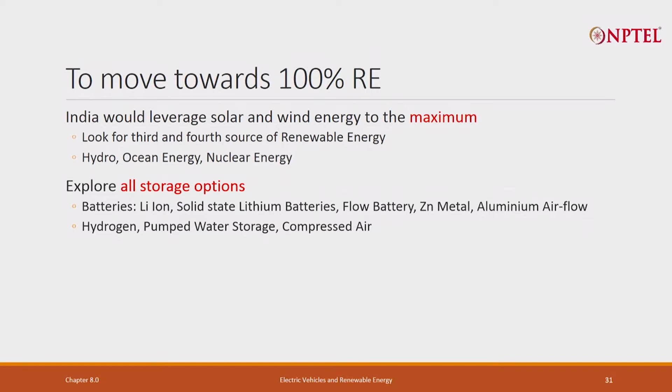So, that will go up, but may not be that bad. Probably 10% of the energy in the country, if I can do long term storage, I probably will be able to work it out quite well. And for 10% of energy, even if instead of 7 rupees it is 15 rupees, it adds an average of 50 paise. Maybe I can afford that. That is what we have to do.

We have to again look at hydrogen, pumped water storage, compressed air. Hydrogen also, the problem is, can I really store so much hydrogen? But all this needs to be really looked at. The third important thing that so far we have not used: if you want to become 100% renewable energy, we have to stop wasting electricity, wasting energy.

Many things in India continue to be inefficient; our usage is very inefficient. For example, our air conditioning is highly inefficient. Can I make it more efficient? Energy efficiency will play a major role, and that is already happening. All our motors are old induction motors, very inefficient. Can I use more efficient motors? The other thing is I can't continue with petrol, I have to move to electric vehicles. That work has to start today, and the first part of our course shows that it is certainly possible.

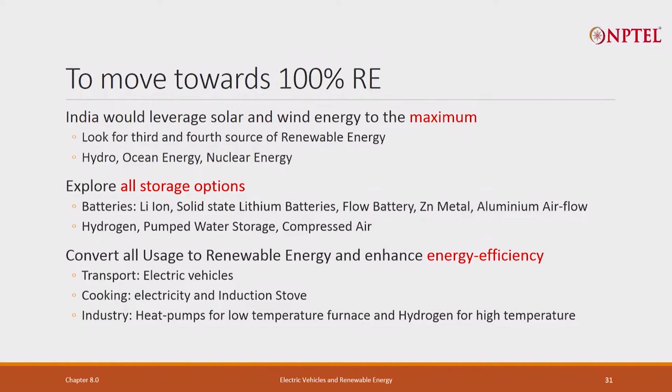Sometimes you do a computation, and if I can make my electricity there, it will make a huge difference. Industry: I have low temperature furnaces and high temperature. For low temperature I can use heat pumps. What are heat pumps? Very similar to the cold pumps which you use for refrigeration. A whole lot of efficient heat pumps can be developed. For high temperature, that is where hydrogen usage is very good. Hydrogen storage we do not know, but for high temperature, make hydrogen from renewable energy and then use it. We will talk about each of these things in the next chapter.

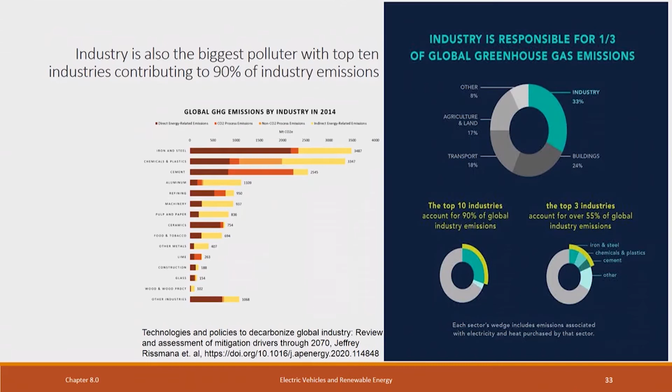Let us look at some other things. Hydrogen. Hydrogen fuel is clean and flexible, very clean. Hydrogen can be burnt directly or mixed with oxygen in a fuel cell. So, it can either be a fuel cell or burnt. Now, you remember that hydrogen fuel cells are not new.

In the 1960s, it was used with rockets, and tomorrow hydrogen will certainly be very important for these things. One is powering rockets, planes, maybe trains and automobiles. Trains can be electricity. Automobiles, this is what long distance truck transport will use. Industrial use, as I told you, is a major usage for hydrogen.

But you know, hydrogen is not an energy source, it is an energy carrier. So, you use renewable energy or some other energy to make hydrogen. So, hydrogen needs to be made from something. If it is made from renewable energy, of course, it is very good. But if it is made from fossil fuel, which is done today, it is an indirect use of fossil fuel. This is not making our hydrogen good. And today most of the hydrogen is generated using fossil fuels.

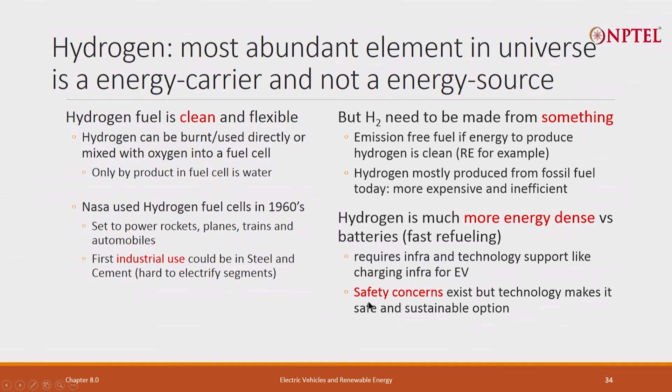Of course, hydrogen has far more energy density compared to a battery. You can compress the hydrogen and you can do fast refueling. It requires infra and technology support, more like petrol pumps. There are huge safety concerns. Compressed hydrogen is not good, but industry can make it safe. Cost is 800 to 900 rupees per kg. But what does that mean? We will come to that in a minute.

But you know, there are different hydrogens. There is black hydrogen made from coal, the most polluting. There is what is called brown hydrogen made from biomass and lignite, which is also highly polluting, or blue hydrogen from ammonia, which is better. Green hydrogen comes from electrolysis using renewable electricity. This cost of 800 to 900 is for these today, not for green hydrogen. Green hydrogen is more expensive.

So, the energy used to generate hydrogen: lowest is coal and biomass, higher using ammonia, reforming by passing through a catalyst to form hydrogen. But if I am using ammonia, should you make hydrogen from ammonia or use ammonia directly? It can be supplied in liquid form, just like hydrogen. So, the question people are starting to ask is, why not have long distance trucks use ammonia directly instead of hydrogen?

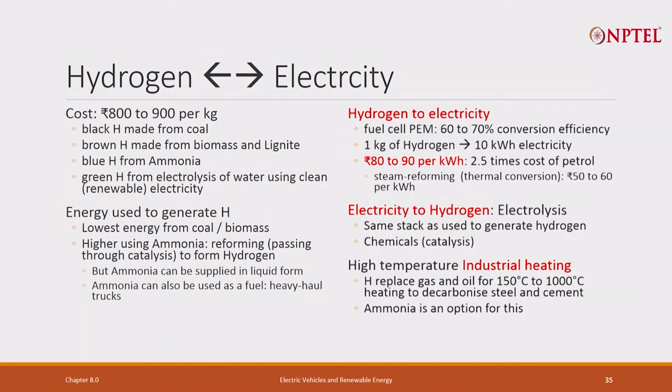And still the drum the government beats is hydrogen. Why? First of all, particularly during Trump days, the United States moved away from renewable energy. Their declared policy was to use fossil fuels, and they started promoting hydrogen, because the oil industry and the whole Middle East didn't want electric vehicles, they wanted hydrogen, and India more or less copies. The Middle East is still pushing hydrogen, and while hydrogen is useful particularly for industry, blindly beating that drum is a problem. Remember the cost.

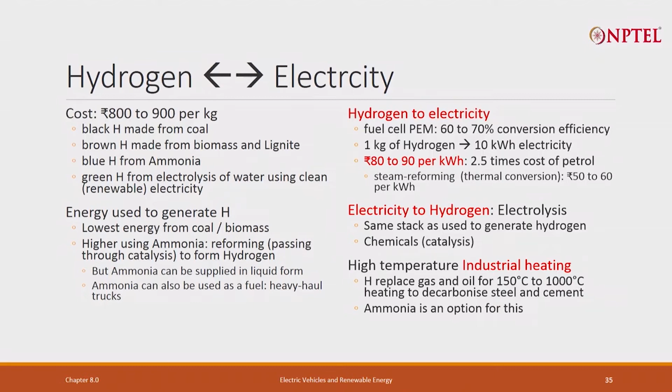As I talked about, for high temperature industrial heating from 150 to 1000 degrees, there is no comparison. Ammonia can be a soft option, but otherwise hydrogen. Hydrogen is projected to become a $500 billion industry. Let us remember one more thing: of the energy that goes into hydrogen, what comes out is less. So, some people are asking, why not use renewable energy directly? The only answer is some places hydrogen is better, particularly industrial usage, and maybe heavy duty automobiles, because carrying batteries will be a problem.

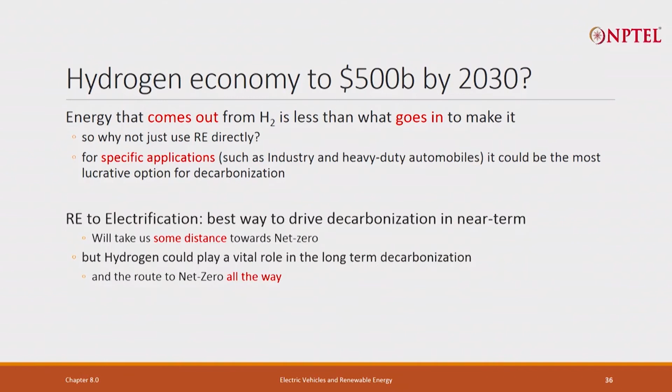So, there is no doubt that renewable energy to electrification is the best way to drive decarbonization in the near term. Once you get to 70-75%, hydrogen will play a very important role. For industry, it will play an important role even today.

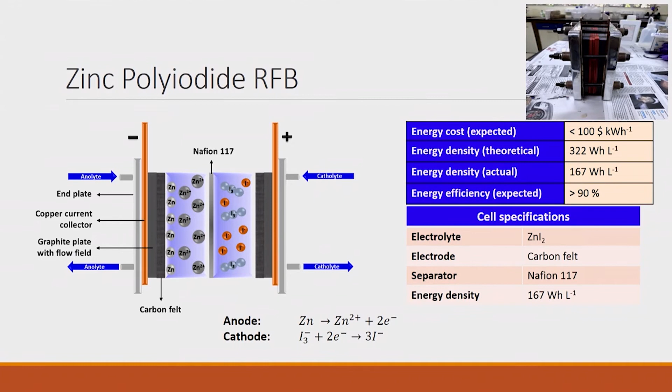Particularly, these are something highly promising. So, this is zinc polyiodide. This is what happens, zinc and iodine are interacting. Its energy density is 167 watt hour per liter, less than lithium ion, but theoretical energy density is 322. Cost is not that high. Materials for this are more easily available than lithium and cobalt, and therefore, it looks somewhat promising. So, work can go on zinc.

But there is this air flow battery, which is only a one way battery, in the sense that it acts as a battery on one side, you can discharge the battery. For example, aluminum air, zinc air, lithium air, there are a lot of options. You can put zinc into this, you can put electrolyte and it acts as a battery. It is a one time usage battery, one time in the sense after you take all the electricity out, zinc is gone, electrolyte is gone. You have to put fresh zinc and fresh electrolyte, that is charging with fresh zinc.

Now, what do you do with the spent zinc and spent electrolyte? Fortunately, there is a regeneration process by which you can get back the zinc and get back the electrolyte. This is like a storage. There are two different plants. One is you keep on creating new zinc and new electrolyte, store it, and whenever you need it, use it in the other battery. Remember, if you can do it cost effectively, you can keep it for 3 months. Zinc and electrolyte will be somewhat voluminous, but not that bad. This can be stored for 3 months.

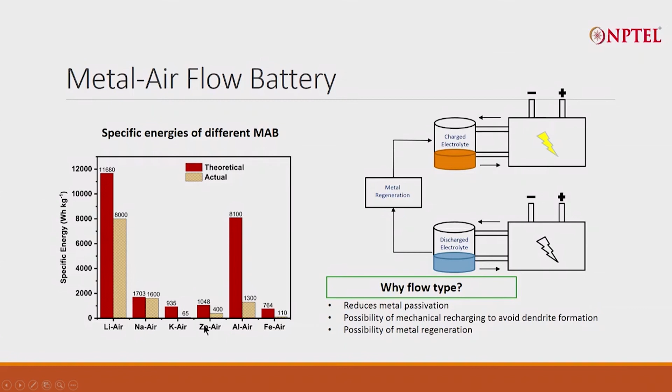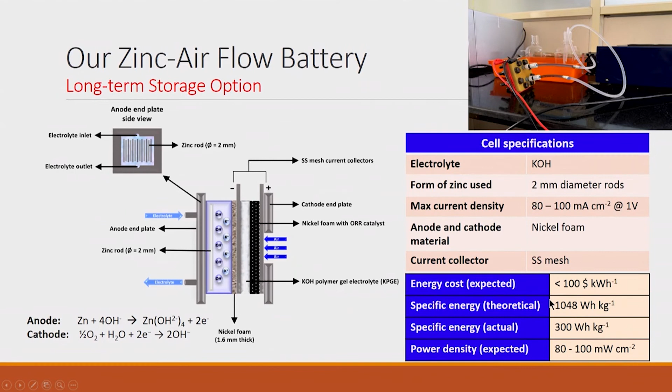And today's zinc air flow battery, of course, while the theoretical capacity is 1000 watt hour per kg, which is very, very good. Lithium ion you do not get more than 300 today, though we are getting about 400 watt hour per kg, 300 watt hour per kg actual, and they are slightly costly, but this is where R&D is required and India needs to pursue this R&D.

Going forward, India would of course expand solar and wind, which play an important role. A third source is important. Small nuclear plants, it will take 15 years for us to get there. Small nuclear plants can be like a tabletop plant, not exactly tabletop, but a small room plant. Can we have that? You know, ocean energy today, large ocean energy, there are plants which convert it to electricity. Coastal India's ocean waves are much smaller. Nobody is doing enough work on that, but that could be another work that could be very important.

The next very important thing is having a very good grid, so that if power is generated in Rajasthan, it can be brought here. If wind is coming in Tamil Nadu, it can go anywhere. And can we have a grid across countries? For example, if I can go with a grid all the way to Saudi Arabia, when ours is evening, when we consume a lot of electricity, theirs is daytime. That time they will generate a lot of surplus. Can I bring that? My storage will also not be required. Similarly, early morning when we do not have electricity, Malaysia or Singapore or Vietnam will have it, can I bring that? Can I put a grid in the country and throughout?

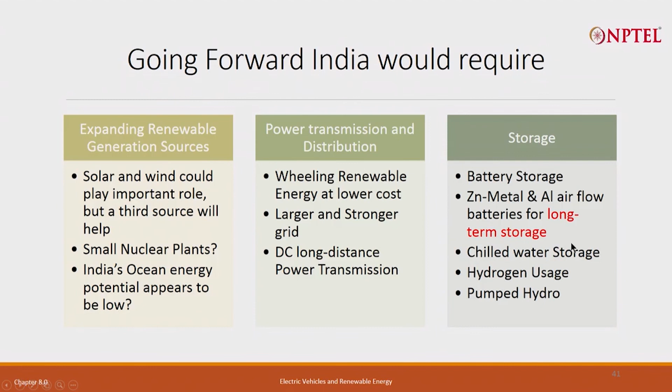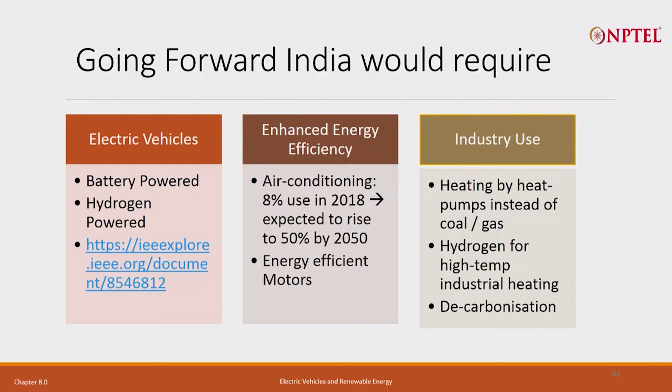Now, of course, you have to work on storage, as I told you, zinc air, zinc metal, aluminum air, chilled water storage, hydrogen, pumped hydro, all of them are important. Electric vehicles we have talked about, this is the high priority. Enhancing energy efficiency in air conditioning will be another top priority. Low temperature heating, we need to do all kinds of efficient heat pumps, that is a good area for Dr. Kaushal to work, and for high temperature heating, hydrogen, and then decarbonization. If you are polluting, can you take the carbon out from the polluting gas, that can be another work.

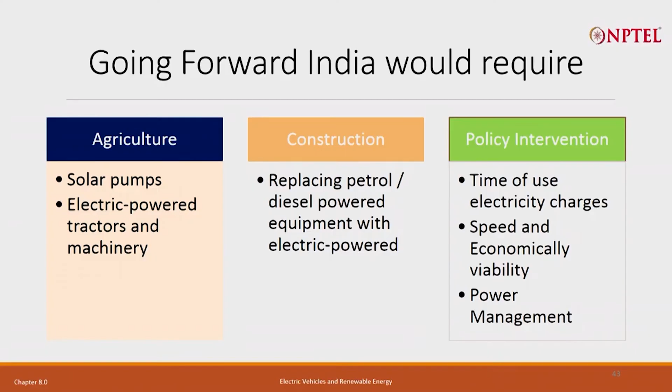Agriculture, solar pumps can play an important role, electric powered tractors and machinery can play an important role. Construction, can we replace all the machinery that we use by electrically driven machinery? Surely, something can be done in the next 4-5 years. All kinds of policy interventions will be required. Time of use electricity charges, economic viability, power management, make the wheeling policy way better. All this requires work, and this is exactly what we plan to do. And this is another assignment, and with that I complete chapter 8.